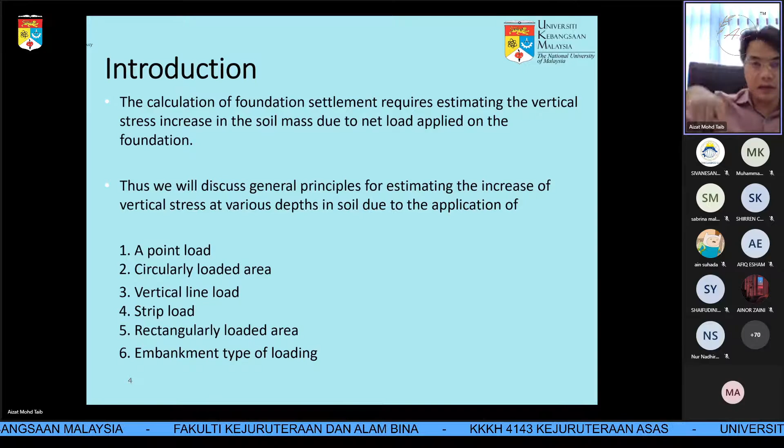So what kind of surcharges? You have a point load - like when you take a pen, put your finger, pinch and point it onto the ground, so the loading is coming via a point load. Circularly loaded area, maybe in circular area. Vertical line loading, strip load, horizontally. Rectangularly loaded area, in rectangular shapes. Embankment type of loading, like a pyramid shape.

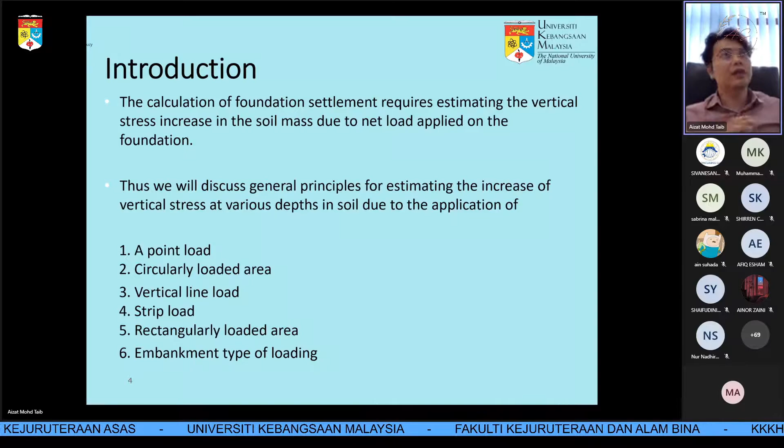Imagine embankment - usually where do you have embankment? Beside the road, near railway, train track. Before you make a train track, usually you have the embankment, which is added on. I don't remember the Malay term for it.

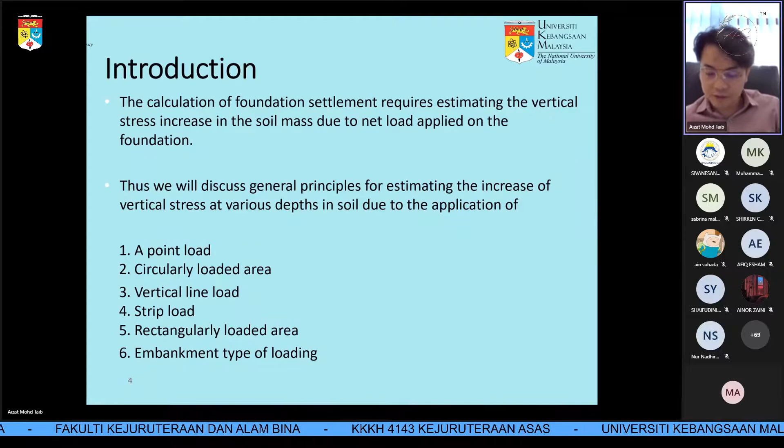Boussinesq in 1885 developed the mathematical relationship for determining shear stress at any point on the surface. So imagine at any point on the surface, Boussinesq looked at the mathematical relationship - how much loading is received here, how much there, how much overall. Referring to the figure on the following slide, we determine the vertical stress increase at point A caused by a load of magnitude P by the equation. I'll use the book for this part since the slide isn't large enough.

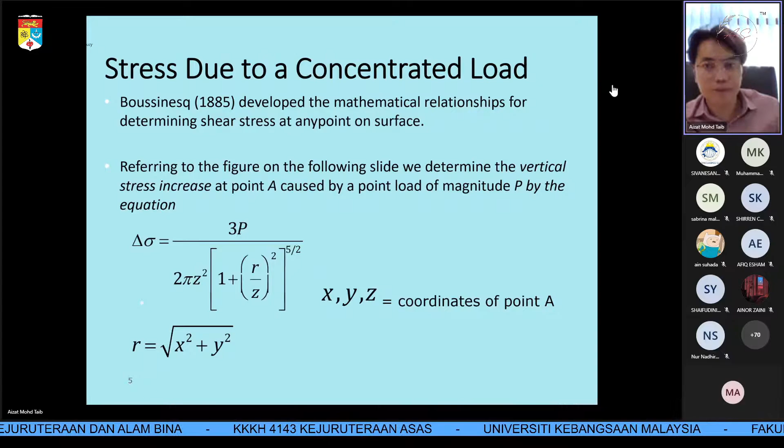Okay, so vertical stress increase.

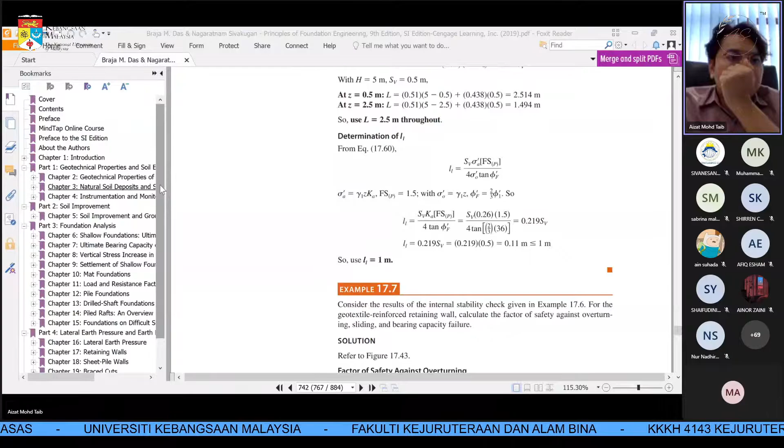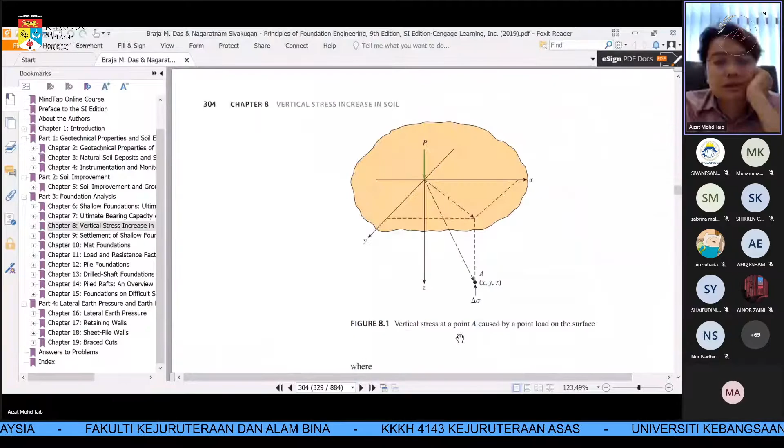So when we look at what Boussinesq has mentioned, the change of stress equals to 3P over 2 pi z squared, times 1 plus r over z squared, to the power 5 over 2. P is the load magnitude.

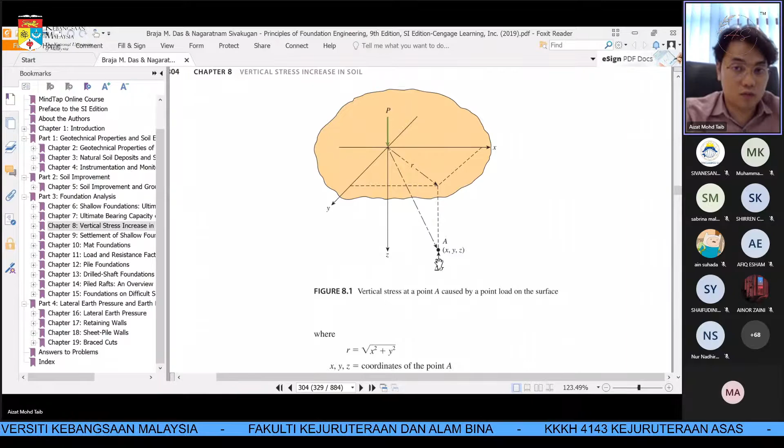The vertical stress increase at point A means, you see this point A, imagine this is your area, this is your ground. This is going to the x-axis, this is going to the y-axis, but this square is actually horizontal, like that. And then you have your z-axis, going down. So imagine if A is at some distance on X, some distance on Y, and then it goes down. That's why you have the value for X, Y, Z.

So at point A, how much does the vertical stress increase?

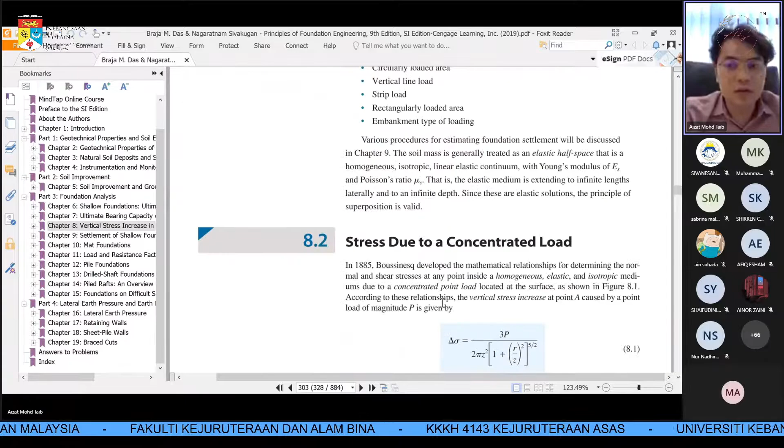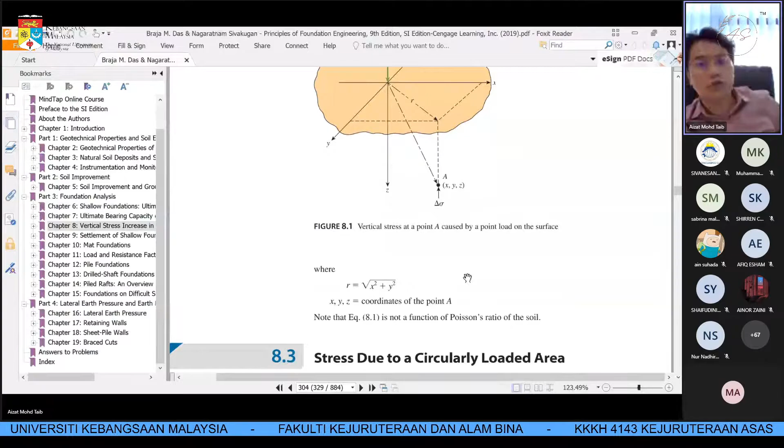So like I said, this is vertical stress. The change is triangle, and sigma is stress. So 3P over 2 pi z squared, z is this height, and then 1 plus r over z, where r is the radius, so r equals to square root of x squared plus y squared. This is your Pythagoras theorem, no problem, I'm pretty sure you can do that. So P is the load magnitude, and you have 2 times with 3, that is the equation.

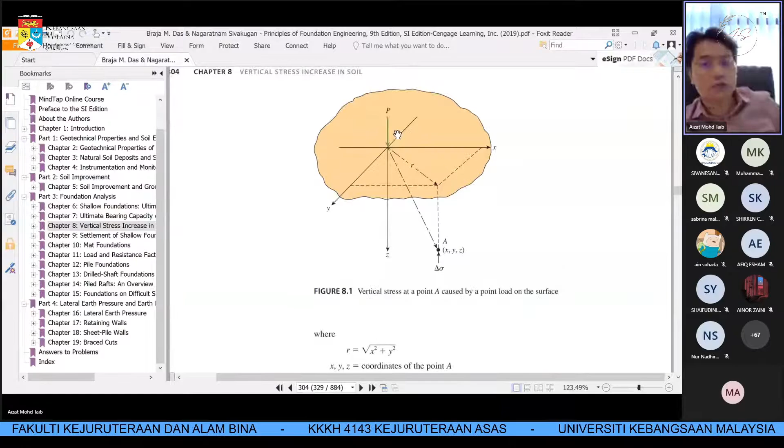So note that equation 8.1 is not a function of Poisson ratio of the soil. This one is for concentrated load or point load. Any question? No?

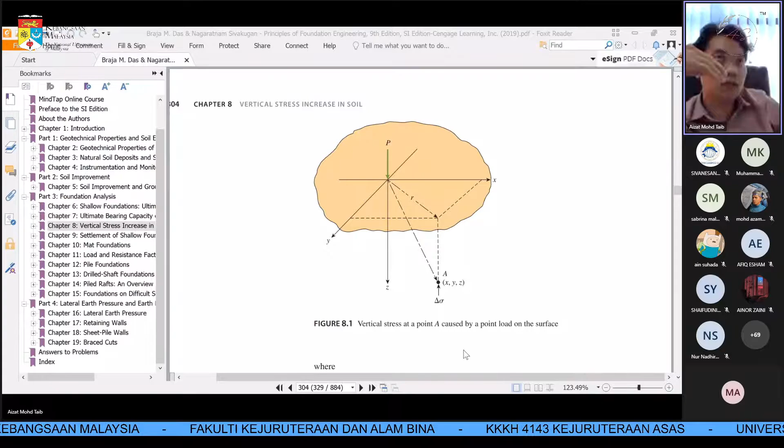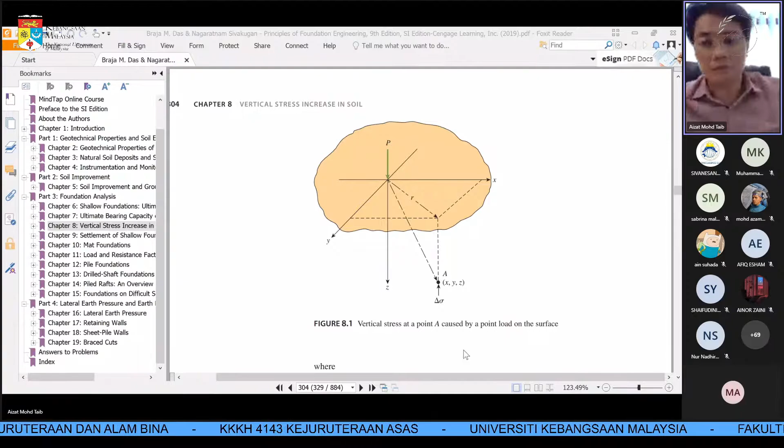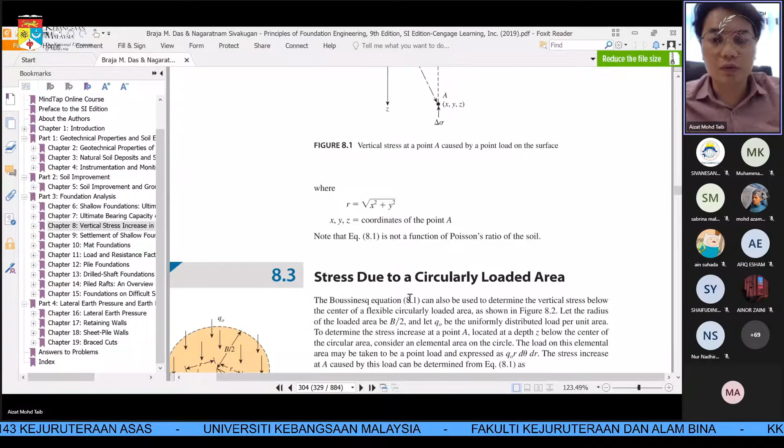Alright, going back to your notes. So just now was point load. Now what about if you have a circularly loaded area?

Same guy, Boussinesq. So they use the vertical stress below the center of a flexible circularly loaded area as shown in figure 8.2. Let the radius of the loaded area be B over 2, because normally they would assume diameter as B, as the breadth.

So B over 2, and let Q naught, which is your imposed loading, be the uniformly distributed load per unit area. Q naught is applied all over, so you see this is Q naught, Q naught, Q naught, Q naught, all Q naught.

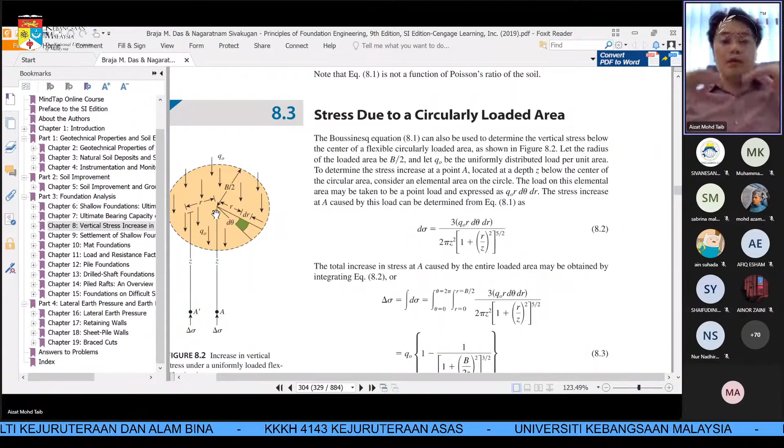And to determine the stress increase at point A, so first we want to find at point A, berapa banyak loading stress increase dekat point A located at depth Z. Katakanlah Z ini berapa, 10 meter, so below the center of the circular area, consider an elemental area of the circle. The load on this elemental area may be taken to be point load and expressed as Q naught R D theta dr.

Awak kena buat pembezaan lah kat sini, but here we assume it is as point load, sebabnya katakan awak letak dekat sini, so dekat center tu jugalah awak nak cari. So you can assume it as a point load. So this is the equation.

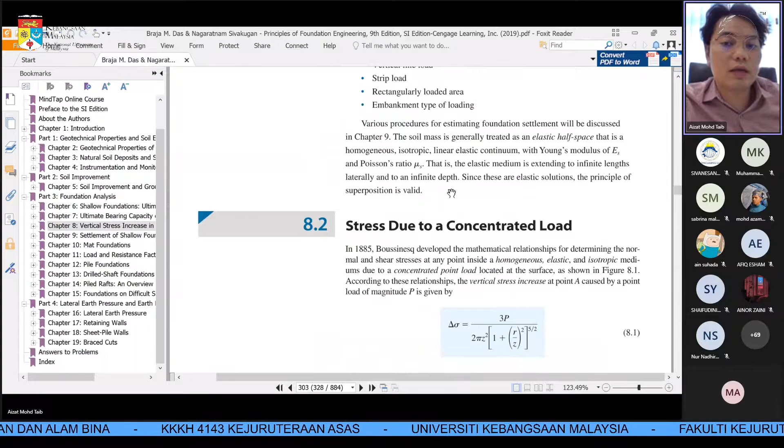Okay, so now it's different from just now, because this is circularly loaded area, so you have to do the pembezaan untuk area tu. If you look carefully, dia lebih kurang sama je macam rumus yang tadi, 3P kan, so now P tu dia dah expand, dia dah pakai Q0 kali R kali D theta dr. And then you see it is pretty similar, 2 pi z squared, 1 plus r over z squared to the power 5/2, it is also the same here. It's just that P tu dia dah berbeza, sebab tadi tu point load, yang ini adalah circularly loaded area.

So the total increase in stress at A caused by the entire loaded area may be obtained by integrating equation 8.2. Pembezaan apa?

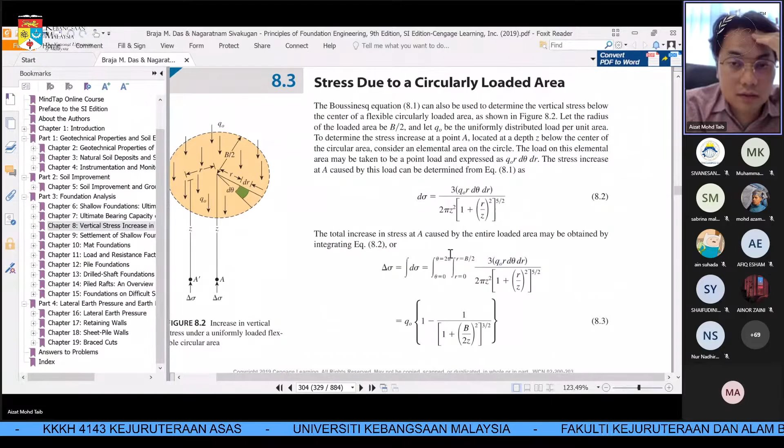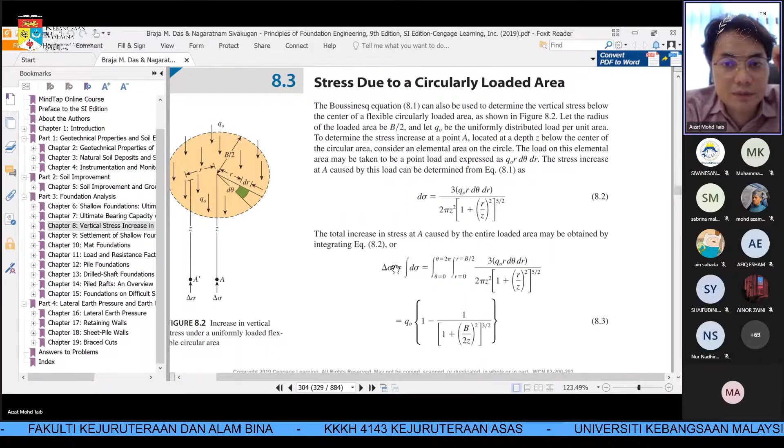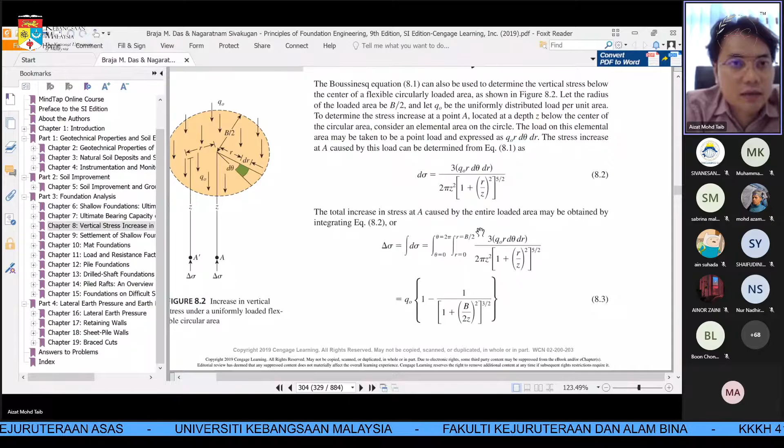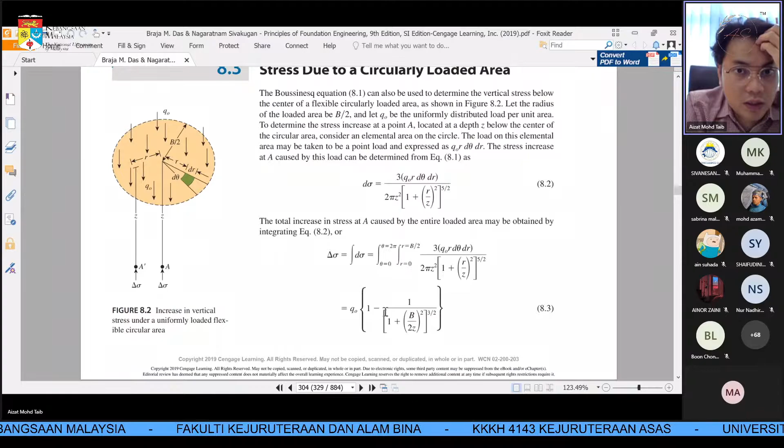Okay, so this is the non-dimensional equation. Okay, nanti kita akan tengok the dimensional equation. Okay, so kali dengan Q0 lah. Okay, this is still a slightly similar equation. Okay, increase in vertical stress under uniformly loaded flexible circular area. Okay, so ini adalah untuk cari dekat point A.

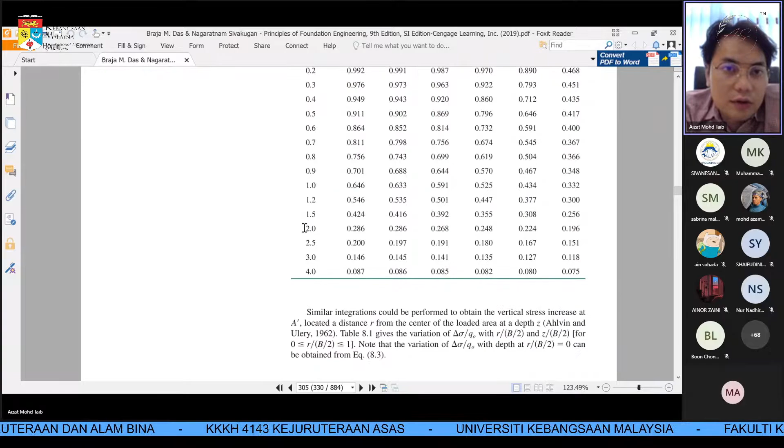Similar integration could be performed to obtain the vertical stress increase at point A prime. Okay, so A prime ni, katakan kedalaman yang sama, but you want to measure it differently. Okay, so this is R. R is the distance for point A prime from the center of the circularly loaded area. So located a distance R from the center of the loaded area at a depth Z.

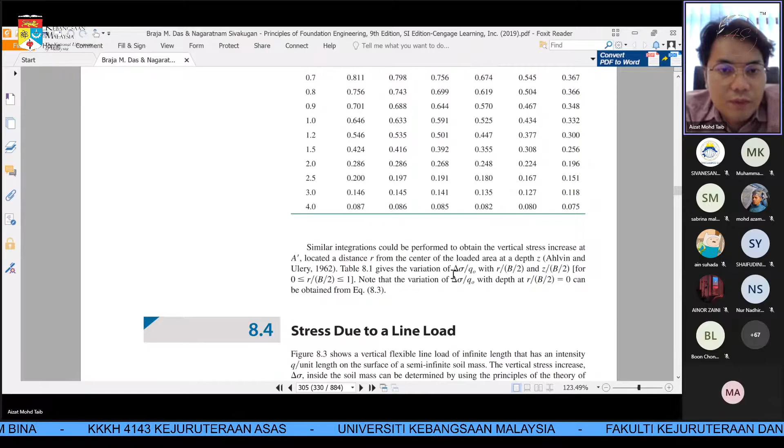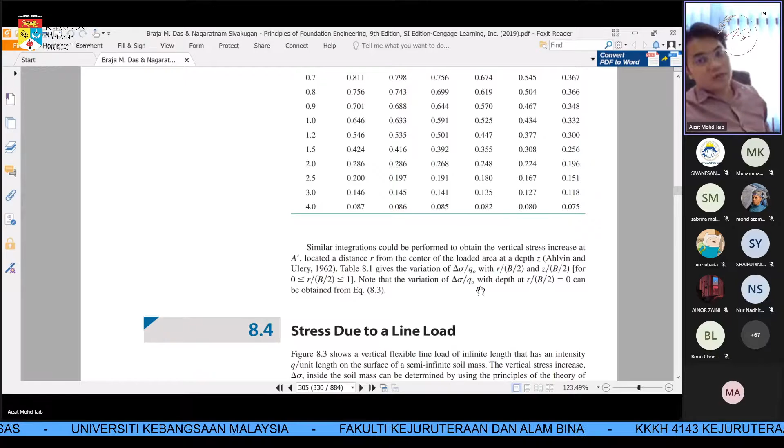Table 8.1 gives the variation of changes in sigma over Q0 with R over B/2 and Z over B/2 for R over B/2 in between 0 and 1. Note that variation of changes of stress over Q0 with depth at R over B/2 equals to 0 can be obtained from equation 8.3. Okay, alright, so variation of changes in stress over Q0 for uniformly loaded flexible circular area.

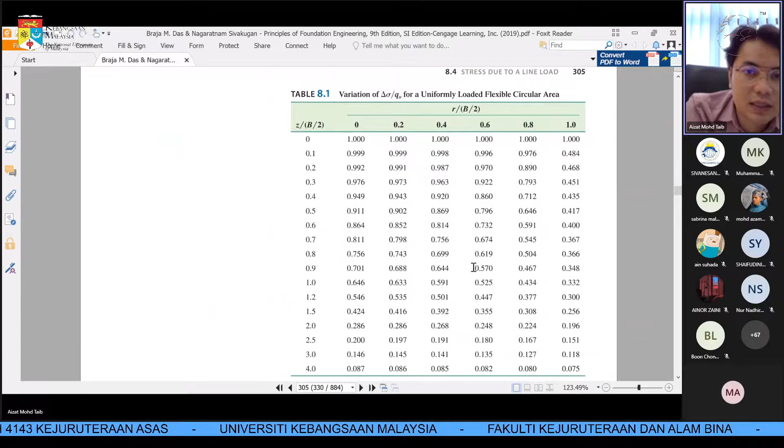Okay, so katakan kita nak tengok yang ini. Kita belum habis lagi kira dia. But they have made some coefficients, some values for variations for us to follow. So katakan awak masuk ke R over B/2. So B is actually your diameter. Katakan diameter is 4. So B/2 is 4/2 lah. And R adalah sama dengan dia punya radius dekat mana awak nak check loading tu. Dia bukan sampai hujung tau.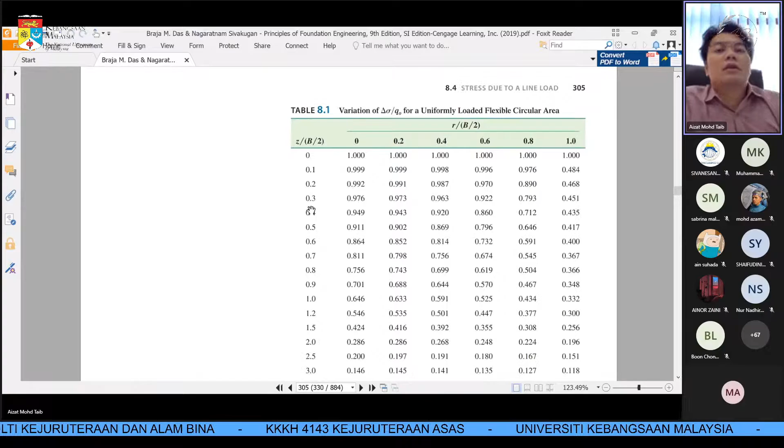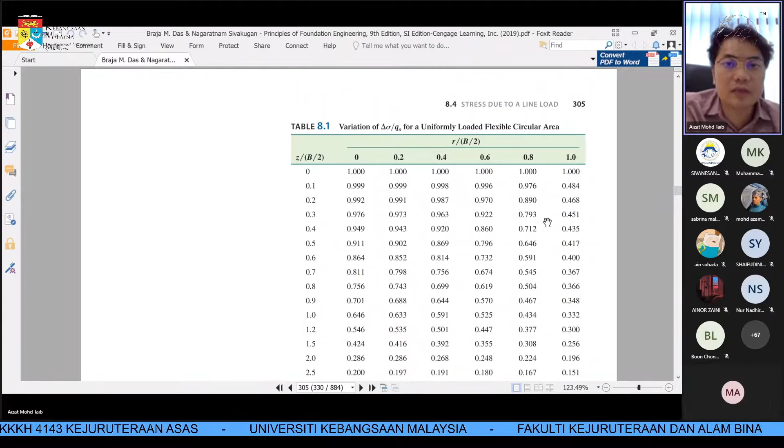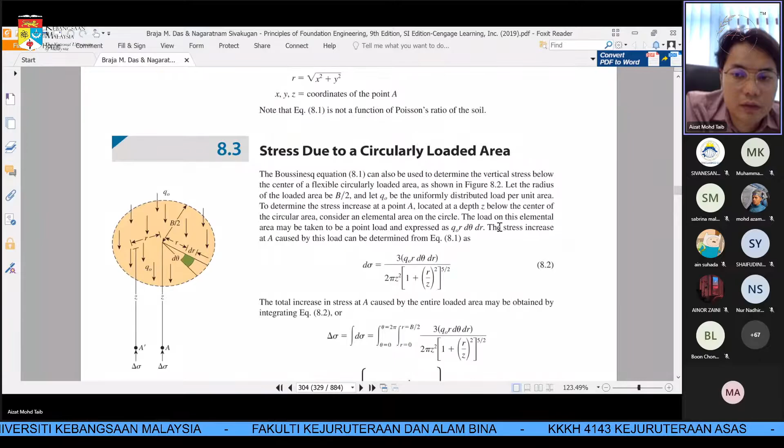Kalau tadi tu B/2 means B from point here to here is B. So in this case half of it, but R is not until the end, it's just until where your A prime is. Alright, so if given the Z over B/2, the R over B/2, then you can get your variations or changes in stress over Q0. Okay, so ini adalah untuk circularly loaded area. Is it still okay? Any question?

Okay, alright. The vertical stress increase. Stress due to a line load. Now we are talking about line load. Tadi itu point, satu titik, and then that titik is giving you the loading. What if it's actually a line? So the whole line is giving you a loading. So figure 8.3 shows a vertical flexible line load of infinite length that has an intensity Q over unit length on the surface of a semi-infinite solid mass.

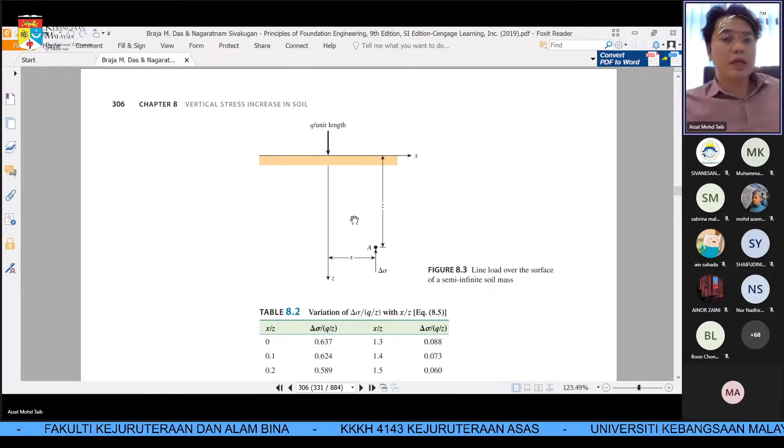And finally, changes in stress over Q over Z. Note that equation 8.5 is a non-dimensional form. Using this equation, we can calculate the variation of changes in stress over Q over Z with X over Z. So kita cakap pasal line load lah. Imagine line load tu, dia adalah satu line di atas. And then kita nak check dekat point A juga. Point A is not directly underneath the load, so dia ada jarak dia. Jarak dia from the line load is X and the depth is Z.

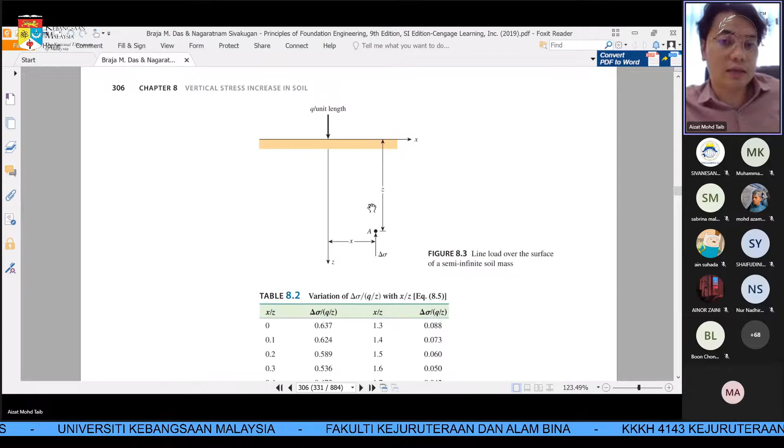And then we can have a look at your changes in stress. So in this case, we follow table 8.2. Apa beza dengan point load? Line load dengan point load ni apa beza dia? Point load ni adalah satu titik. Imagine jelah satu point tu. And then line load ni means you have the loading comes in line. Nanti saya cari gambar lah, and then I show you. Is that okay?

Boleh. Okay, kita carry on dulu. Sebab dah nak habis pukul 5 dah.

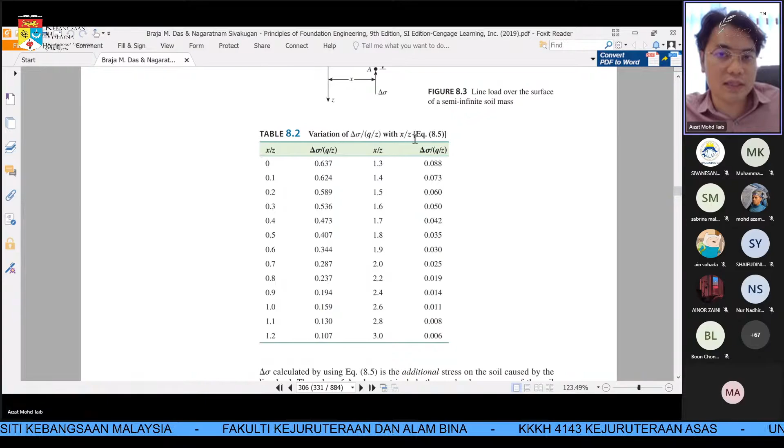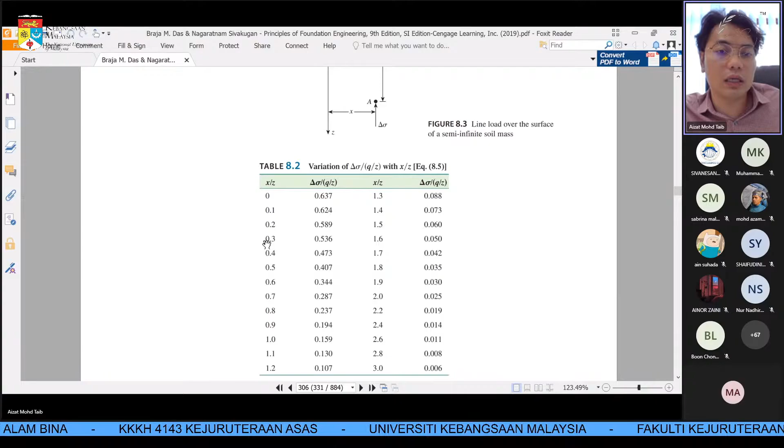Okay, so for this one, changes in stress over Q over Z with X over Z. So all we have to know is the X over Z. So untuk line load ni, we have to know the distance, X dan Z. So dua tu je lah. So katakanlah X ni 5, and maybe the Z is 20. So X over Z, 5 over 20, it's berapa? 5 over 20, 0.25.

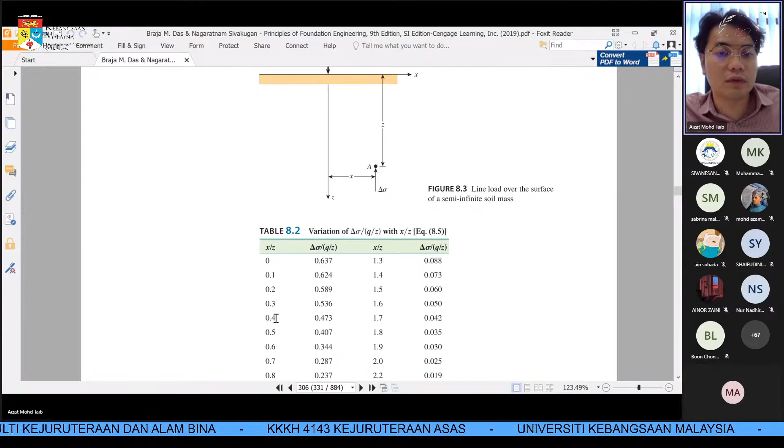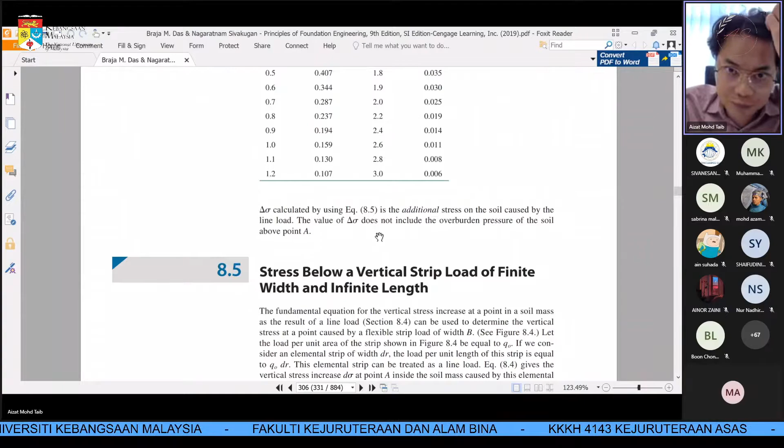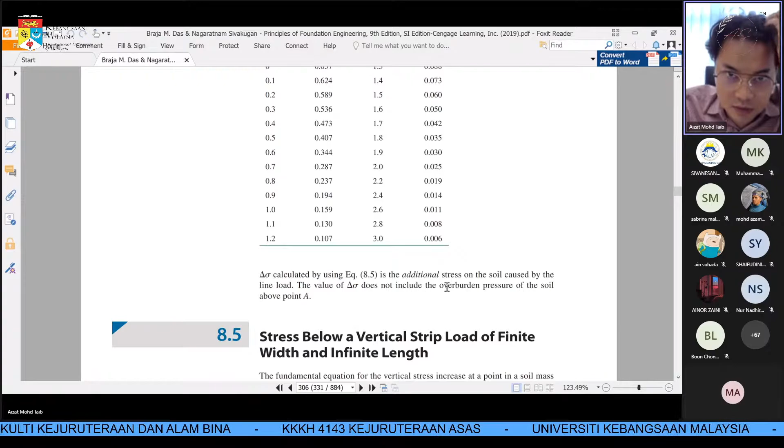Alright, so changes in stress calculated by using equation 8.5 is the additional stress on the soil caused by the line load, okay. The value of changes in stress does not include the overburden pressure of the soil above point A. Okay, equation 8.5 is the one caused by the line load. Okay, alright.

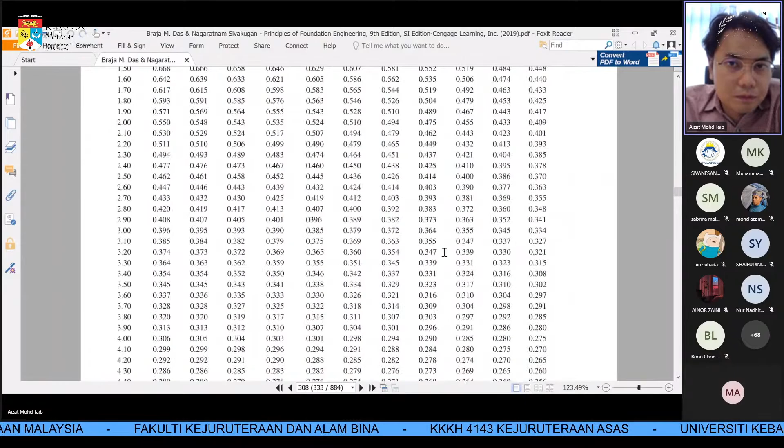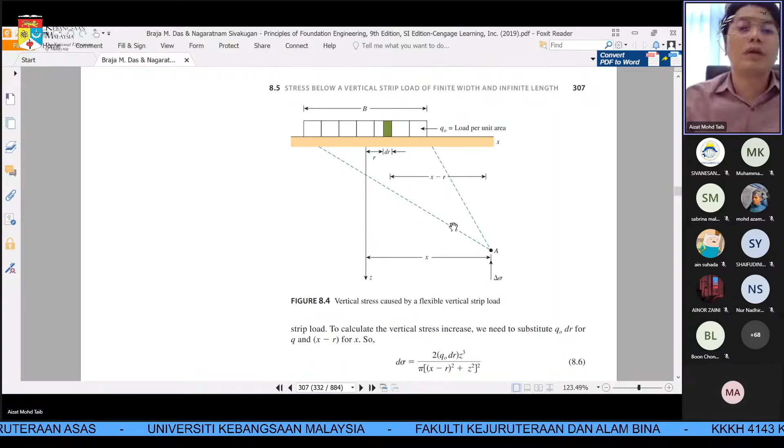Perfect. Alright. Okay, so stress below a vertical strip load of finite width and infinite length. Okay, so maksudnya width tu awak tahu, tapi dia punya panjang tu you don't know, it's infinite. It's a strip loading, ibarat macam awak buat strip footing lah. So lebar tu awak tahu tapi panjang tu tak ke mana-mana. It goes on and on.

Okay, so the fundamental equation for the vertical stress increase at a point in soil mass as a result of line load, section 8.4, can be used to determine the vertical stress at a point caused by a flexible strip load of width B. So dia cakap kat sini width B dah bagi, tapi dia punya length tak tahu. Let the load per unit area of the strip shown in figure 8.4 be equal to Q0. So load tu adalah sama dengan Q0.

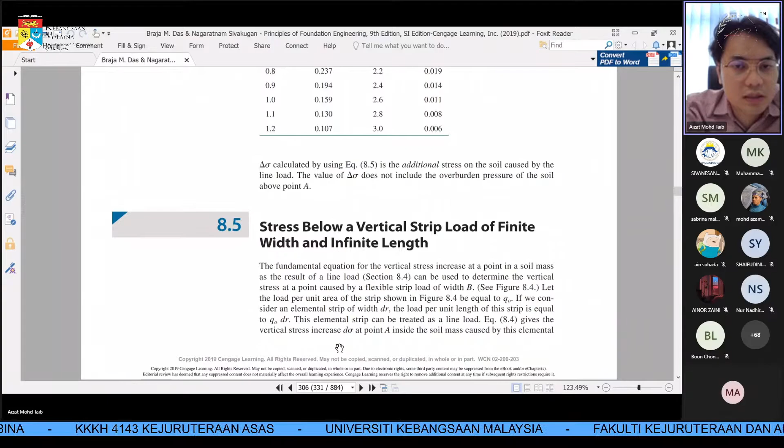If we consider the elemental strip of width dr, the load per unit length of the strip is equal to Q0 dr. So Q0 tadi tu, awak akan kamilkan dengan the changes of dia punya R, somehow like the radius, but it's not radius. In this case we have infinite length. So this elemental strip can be treated as a line load. Equation 8.4 gives the vertical stress increase at point A inside the soil mass caused by the elemental strip load.

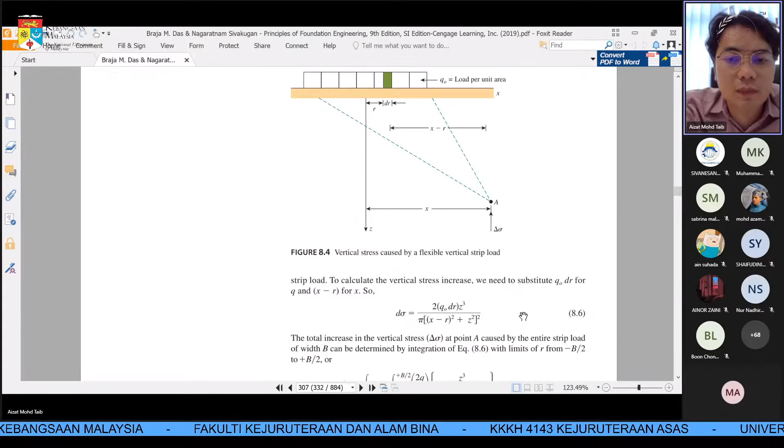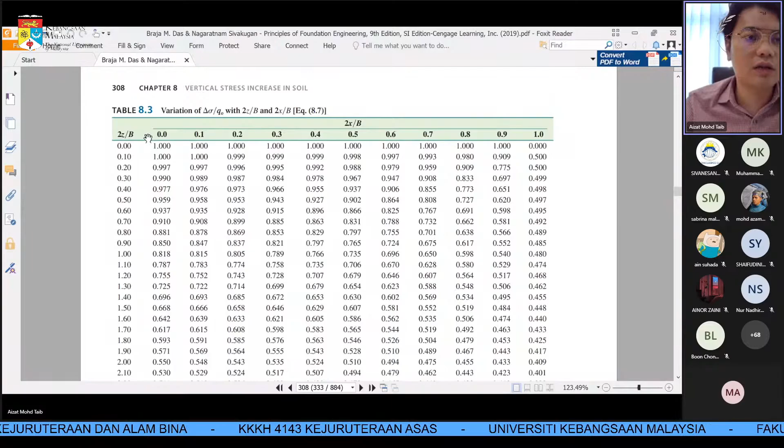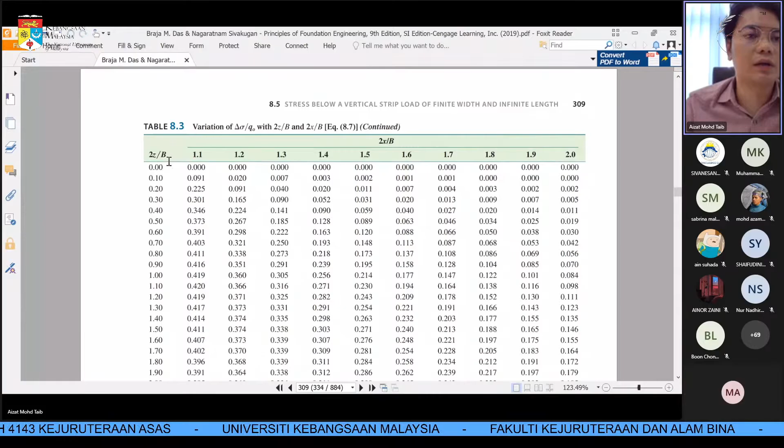So to calculate the vertical stress increase, we need to substitute Q0 dr for Q and X minus R for X. I'm not going through the whole equation, but this is the main equation, but it's still in pengamiran, so you need to do the pengamiran. So variation of changes in stress over Q0 with 2Z over B and 2X over B. You use table 8.3 for 2X over B, from 0 to 1.0 and then 1.1 to 2.0.

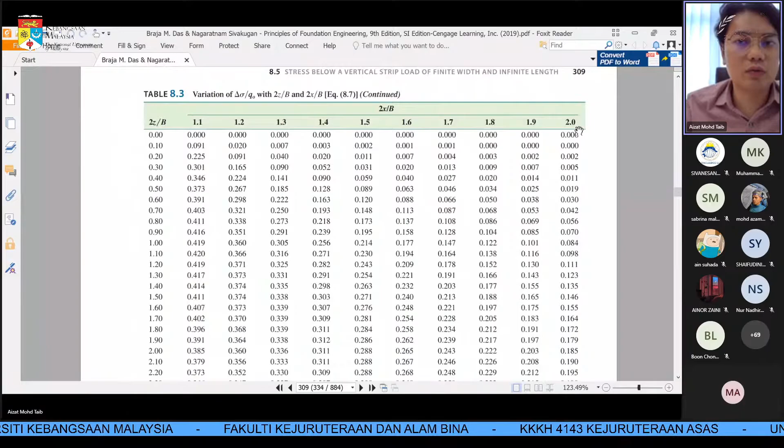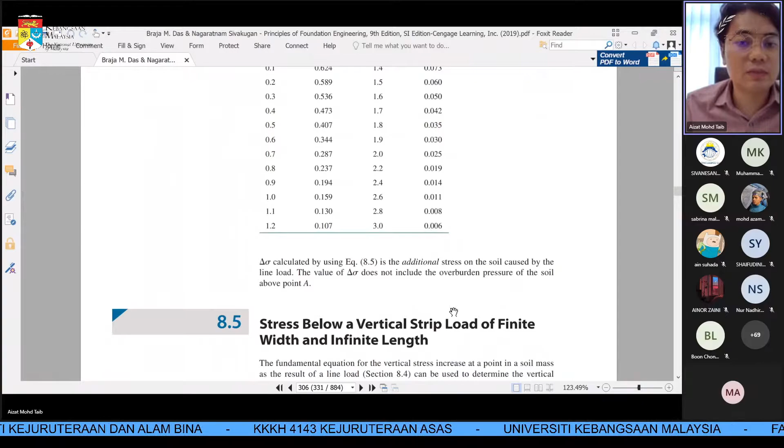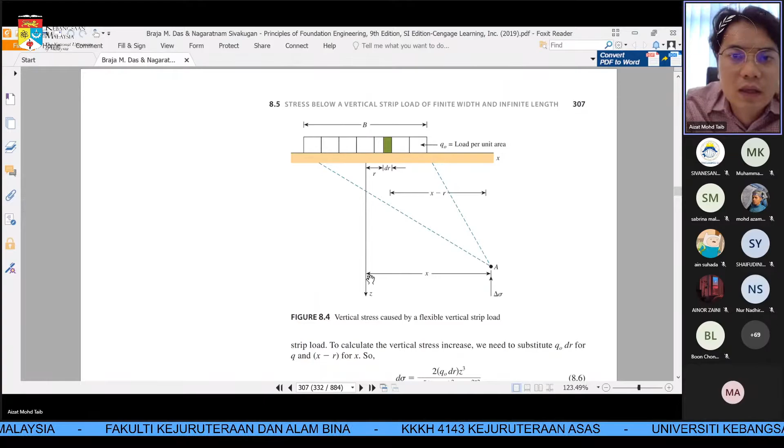Alright, so this is for the vertical and the horizontal stress below a vertical strip load of finite width and infinite length. So this is the width, this is fixed. Then this is R, changes in dr, load per unit area, X minus R. Point A is where you want to find the changes in stress. X is the distance from the load, the location of the load.

So kita tengok ni, just a quick one for stress below horizontal strip. Tadi vertical strip. Refer to figure 8.4, they are using this figure. B here, R here, X minus R at point A, load per unit area. So since 1 is less than B over 2 equals 2. B over 2 means the breadth, and the breadth is 4, so 4 divided by 2 gives 2. So X of 1 meter is smaller than 2 meters.

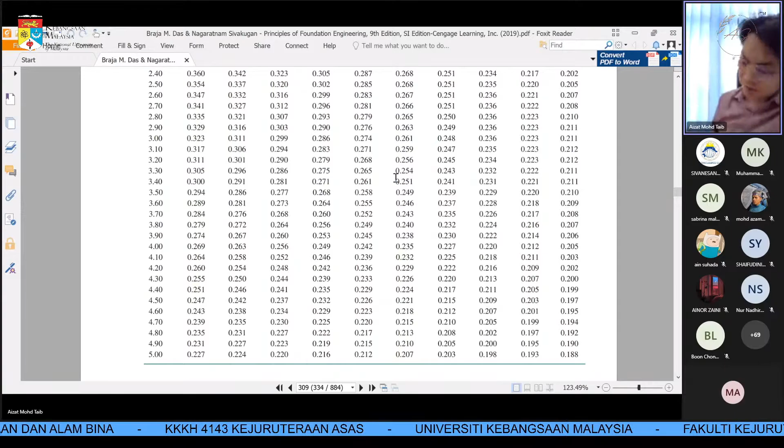So from the equation, with the limit from minus B over 2 to plus B over 2, the total increase in vertical stress at point A caused by the entire strip load can be determined by integration with limits of R from minus B over 2 to plus B over 2. This is the equation. The tangent terms are in radians.

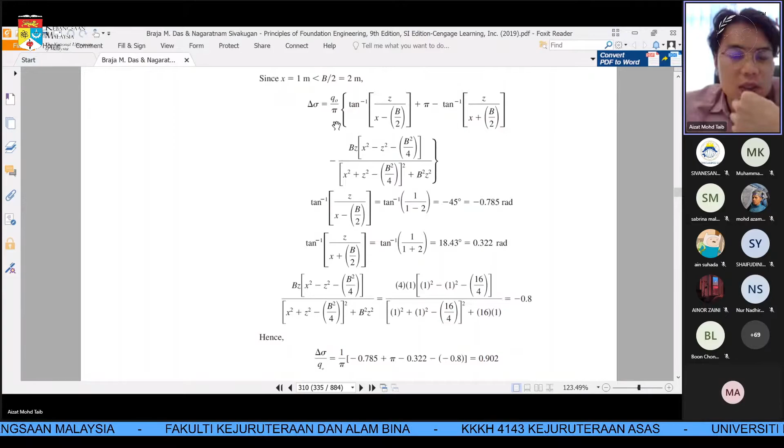So this equation, the changes in stress, is referring to 8.7. So tadi tu yang ini the main equation, and then as you expand it, you can get this one. So x must be more than B over 2. The equation 8.7 is valid as shown in figure 8.4, that is for point A where x is more than B over 2.

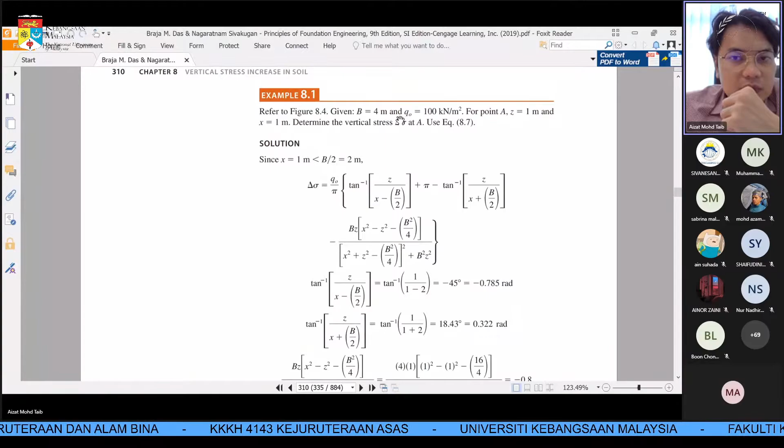So in our case, x is 1, which is less than B over 2. B over 2 is 4 over 2, so B over 2 is larger than 1. So minus 1.

Kalau tak, tangent... q0. Okay, alright. Minus, okay, plus minus tangent. Okay, in radians. For x is less than b over 2, for this case it should be replaced by pi plus tangent. Okay, alright.

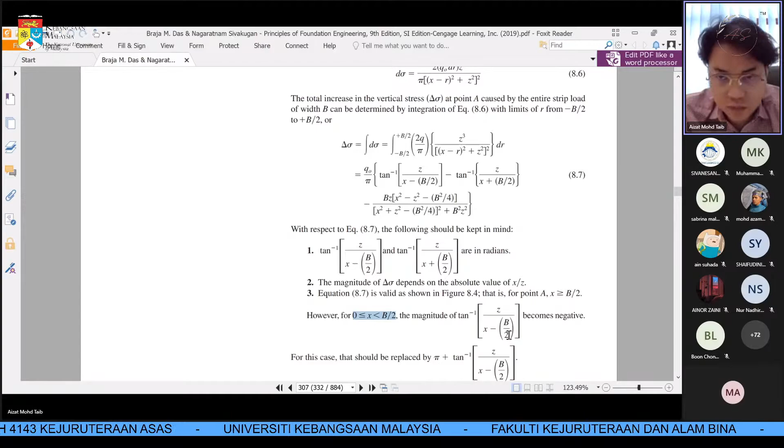I believe they actually used this one for the reason that x is smaller than b over 2. So as you carry on, tangent minus 1 z over x minus b over 2. And for this case, it's quite lengthy lah juga for this one. I don't think I've done this one before in the class.

Figure 8.4, given b equals 4 and q0 equals 100. For point A, z equals 1, so z turun 1, and x equals 1. Determine the vertical stress and use equation 8.7. So they mentioned to use 8.7, so we have to use this equation, although from minus b over 2 to plus b over 2. So basically we just use this equation to find the changes in stress.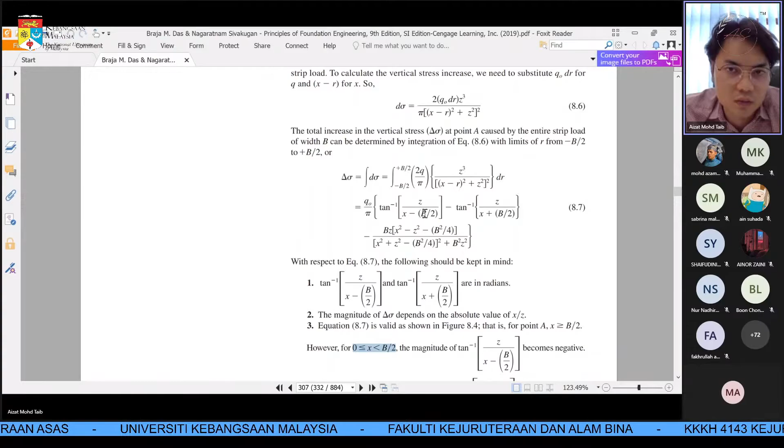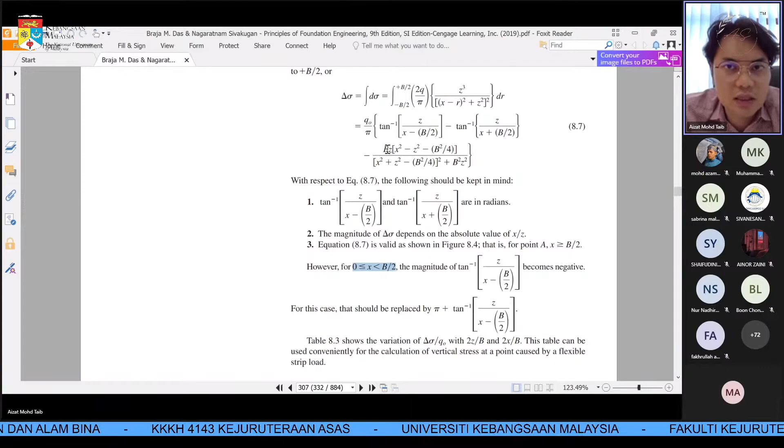So q0 kita dah ada 100, pi we know, tangent minus 1, z kita dah tahu 1, b kita dah tahu 4, x kita dah tahu 1. If you look into the equation, they just fill it in. This equation ni panjang kan, ni sampai sini. We know the b, we know the z, we know the x: x is 1, z is 1, b is 4. As you fill in the equation, finally you get minus 45.

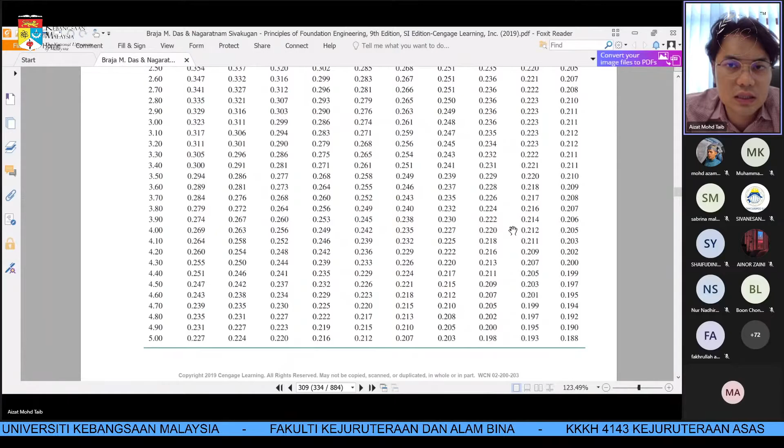But please be reminded that it should be in radians. The equation is in radians, so you have to convert it into radians. So finally 0.902 is the change in stress over q0. So this is 0.902 q0, check. Finally q0 is 100, so you get 90.2 kN per meter square.

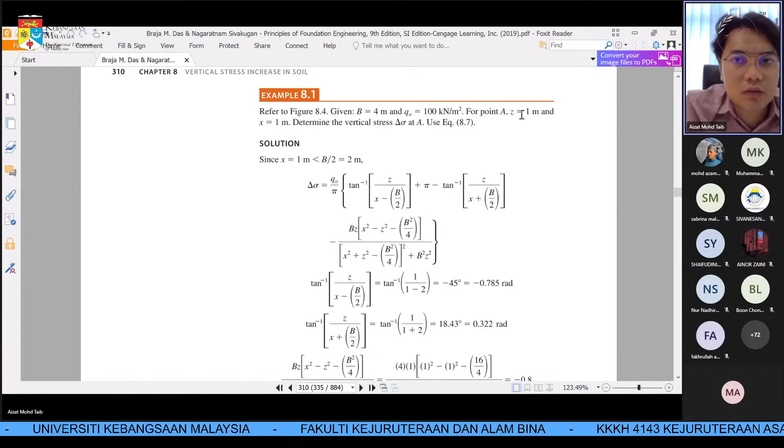I'm so sorry, I've been rushing to complete before 5. So this is actually very simple. I'll let you go through by yourself, and I've assisted you throughout this example. Like I mentioned, this is equation 8.7. You know z, you know b, you know q0, you know x. So this one can be settled. Finally you get the degree, and then change it into radian.

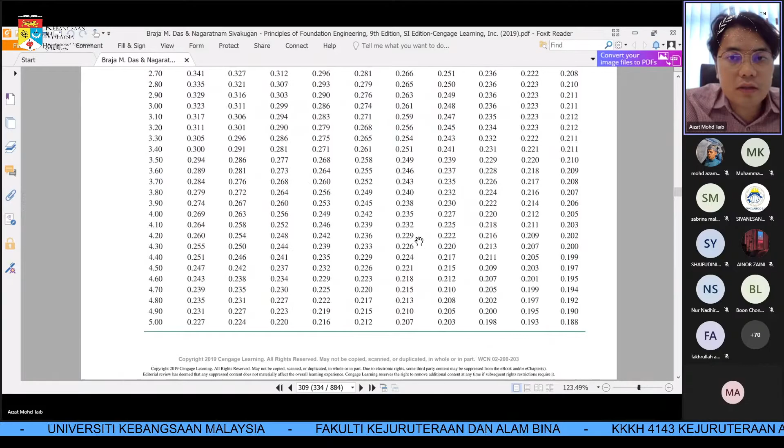So this equation is the change in stress over q naught. We know q naught, so we just fill it in: the change of stress 0.902 times 100, you get 90.2. So at point A here, the stress increase is 90.2 kilonewton per meter squared. Is that okay?

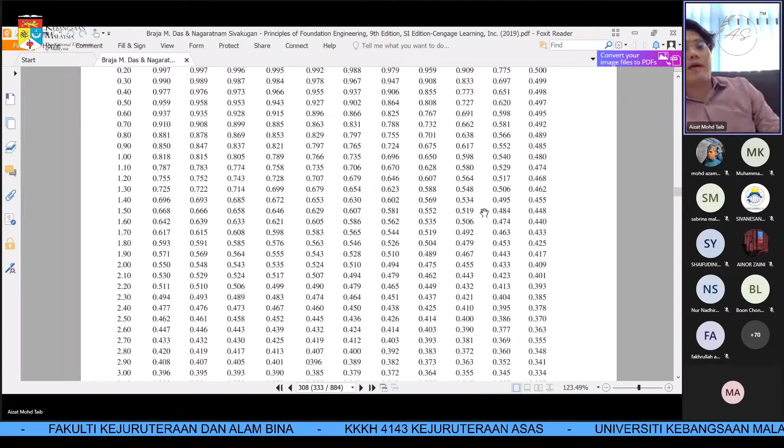Hello. Hello. Okay. Are you okay? Nak kena revise balik lah, slow. Okay. Alright. So nanti you revise that example.

And then we continue with the horizontal, and then we have rectangular and isobar. Saya tak ajar isobar. Tapi ada satu, this is the Newmark method. The Newmark method is very important, so I will teach you the Newmark method, and then that will be all for that chapter. Then we have to jump to, apa nama benda tu? Settlement, sebelum awak masuk piling.